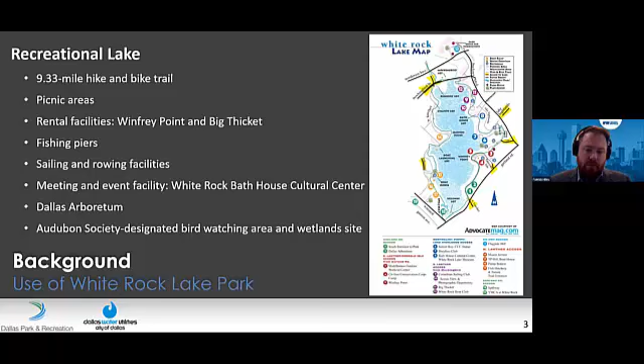So White Rock Lake is obviously an important natural asset to really all of the citizens and surrounding communities of Dallas. And as you may have realized if you've been out there or heard folks talking about White Rock, it does have some sedimentation issues. And so that's what prompted our study, this dredging feasibility study, and we'll get into a little bit more later about what that feasibility word means. But first, let's talk a little bit about the lake itself.

Originally constructed in 1910 as the original water supply reservoir for the City of Dallas, White Rock is now only a recreational lake. So the water supply benefits have been abandoned a long time ago, and now it's this beautiful natural gem in the middle of the City of Dallas. Excuse me.

As you probably know, there's an over 9-mile hike and bike trail around the lake. A lot of natural features, places where you can go enjoy a nice spring day with your family and friends. So a lot of folks make use of White Rock Lake, whether it's the lake itself for sailing, kayaking, etc., or the trails and natural areas around the lake. So it's obviously very important to the city.

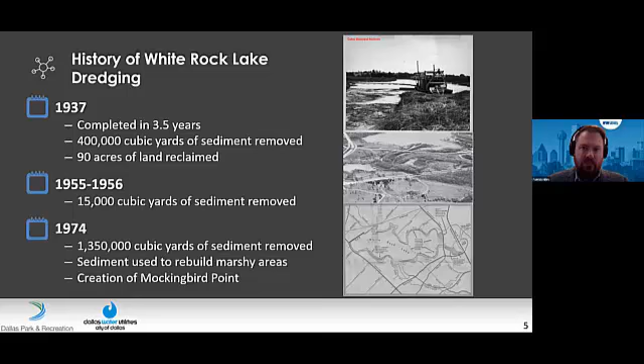One thing you may not know, though, is that over the 110-year life of the lake, originally constructed in 1910, it's been dredged 4 times: in the 30s, 50s, 70s, and most recently in the mid-90s. So on about every 20-year or so cycle, the lake has been dredged for various reasons.

1937 saw the first dredging project. 400,000 cubic yards of sediment were removed from the lake at that time. It took almost 3.5 years to complete that project. That large undertaking was in large part done in the dry, actually. From what we've heard about the historic records, there were some droughts going on in that time period, and part of the reason they were able to excavate as much as they did was because a lot of it was above water, surprisingly.

So moving forward into the 1950s, 55 and 56, only about 15,000 cubic yards of sediment removed at that time. We don't have a whole lot of information about that dredge project other than that volume. But in the 70s, it started getting larger. So almost 1.5 million cubic yards of sediment were removed. A lot of that was actually utilized to rebuild some marshy areas around the lake. So this actually created Mockingbird Point, the area near the dog park in the northwest corner of the lake, if you're familiar. Side note, today with the range of environmental regulations, et cetera, that sort of land reclamation would probably not be permittable.

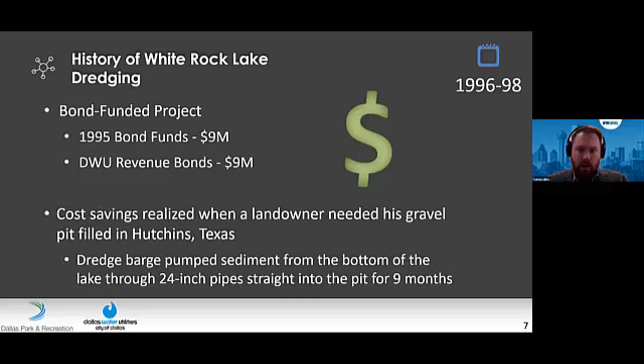Now, one thing that's really important to realize about the dredging that occurred in the 90s is there's a lot that went really well. They had a lot of good things fall into place, really the biggest of which was that a landowner down in Hutchins, Texas, had a gravel pit, a quarry, that had completed its serviceable life and needed to be filled in. Okay, and so this landowner worked out a deal with the city to basically pump all of the dredge materials from White Rock Lake to his gravel pit. He accepted all that material, dewatered it on site, and basically filled in the pit with that. That really reduced the cost.

And as we'll talk about here in a little bit, dewatering and disposal for a dredging project is really probably the largest single cost driver when it comes to figuring out how much that costs. But the dredge barge was located in the lake and pumped out sediment through a 24-inch pipe for almost 9 months straight. So quite a large activity, as you can imagine. A lot of folks around the lake still remember that effort, and so through our public involvement components, we learned a lot more. You know, just folks that had experiences with the dredge, folks that had memories of not only what happened, but really even how it came to be, and that was really helpful to shaping our study.

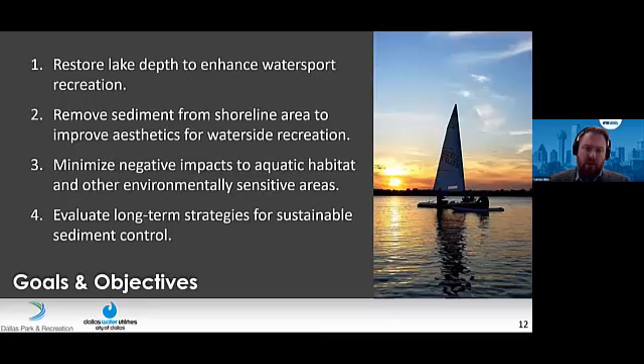From all of that, we really gathered that there are these 4 primary goals of a potential dredging project, right? So as we mentioned, there's no longer a water supply component to White Rock Lake. It has very little, if any, impact on flood control, definitely no official flood control benefits. And so the only real goal here was recreational, environmental, aesthetic improvement to the lake, right? So primary to that, restoring lake depth to enhance water sport recreation. So primarily sailing, kayaking, etc. And then also the water side recreation as well.

So number 2 there, improving the lake itself, both removing sediment, improving aesthetics, so that everyone visiting the lake is improved. So not just focusing on the boating aspect, but really the health and well-being of the entire lake. Obviously, we want to minimize any negative environmental impacts to the aquatic habitat itself or any of the environmentally sensitive areas surrounding the lake. So that was a key component.

And then finally, any of the solutions we propose, we want them to be long-term strategies, right? We want them to be sustainable. We recognize that all reservoirs, and particularly reservoirs in urbanized areas and of the size that White Rock Lake is, all of them have to deal with sedimentation in one way or another, right? So silt is going to flow down White Rock Creek continuing in the future. And so we want whatever solution we propose, whatever program we propose, to be sustainable, right?

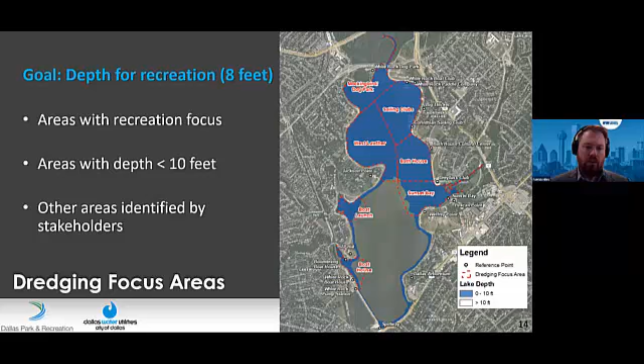there are portions of the lake that are deep enough that don't need additional depth. And so what we've done is we've highlighted in blue in this figure on the right the areas of the lake at 10 feet or less in depth. In conversations with the various boating groups, the sailing clubs, rowing clubs, as well as our own research about water sport recreation, we really set this target depth of about 8 feet. So at about 8 feet, the lake is good and usable for recreational activities.

We then further subdivided the lake, again, some based on geography and some based on community input, into these areas in the dashed red lines. What this allows us to do is to understand how much sediment is in each region of the lake. The lines are somewhat arbitrary, but they help segment up the lake. Because, for example, you may have some areas that you want to dredge to a deeper depth, and some that may not need as deep of a depth.

For example, Sunset Bay on the east side of the lake is very much a birding location. There are a lot of bird communities, waterfowl communities that either migrate through that area or call that area home. And so because of that, there's not as much boating activity, so you may not need to dredge it to the full 8-foot depth. The whole purpose there is just giving the city flexibility in developing and custom fitting a dredging program.

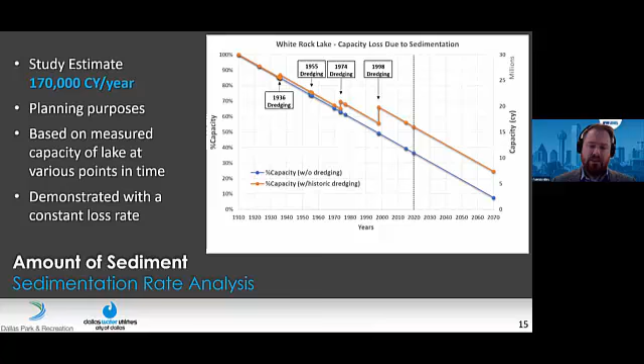Another component that was really critical to our study is trying to wrap our hands around how much sediment enters White Rock Lake on an annual basis. Now, for any of you who have tried to develop a sedimentation rate for a specific reservoir, you'll know that there's a lot of variability in that. There are a lot of different factors that affect sedimentation, and it varies wildly from year to year.

But our goal was to try to get a good average number, and so based off of the history of the lake, including the 4 dredging projects and a few different bathymetric surveys in between, we developed this number of about 170,000 cubic yards per year entering the lake on an average basis. That's what this chart on the right shows you. The orange line is the actual storage capacity of the lake. You can see it's at 100% starting in 1910, and then it's gradually decreasing over time by about 170,000 cubic yards per year.

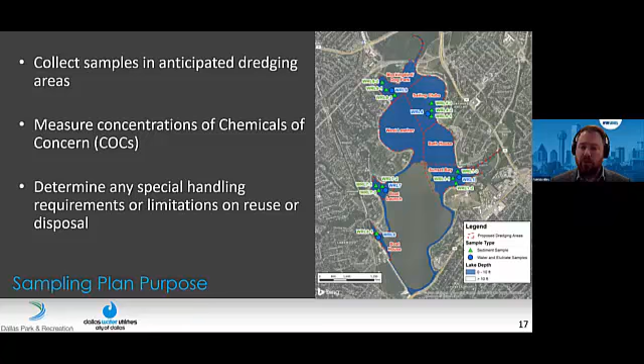Additionally, we wanted to do some screening level environmental sampling of both the reservoir sediments and the water itself, what we would call an elutriate sample, so the water near the surface. We did collect quite a few samples in various areas of the reservoir. The goal here, again, screening level, was trying to identify if there are any areas that we need to look out for, any red flags.

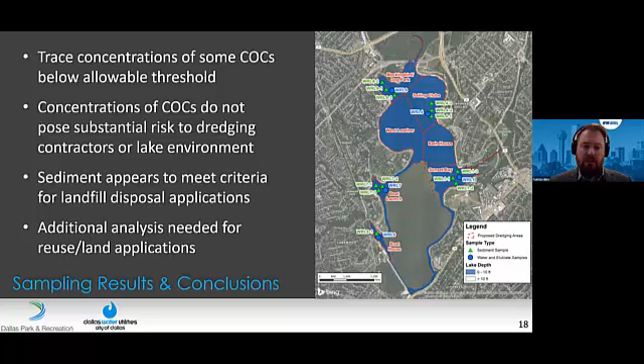In the sampling process, they measure what are called chemicals of concern, COCs. These are chemicals that are present in water bodies and may cause concern if they're above certain thresholds. The goal here was to determine if there might be any special handling requirements for a dredging project, and if there are any limitations on what can be done with the sediment after it's removed, how we could dispose of it.

And the general findings of the study were that the COCs were all below allowable thresholds, such that the concentrations would not pose any substantial risk to dredging contractors doing the dredging activities, nor any risk to the lake environment itself. The sediment also appears to meet criteria for landfill disposal applications, meaning you wouldn't have to do any additional permitting or mitigating for landfill disposal.

However, there is some additional analysis that would be needed if you were looking at a beneficial reuse or land application scenario where you're spreading the sediment in just an open area. And that's normal for a dredging project. As I said, this was screening level sampling, and the goal was really just to get the red flag.

So good news results for a dredging project as related to the sampling results, which really kind of give us the clear. There weren't any particular areas with concerns that we knew we would need to watch out for a future dredging project.

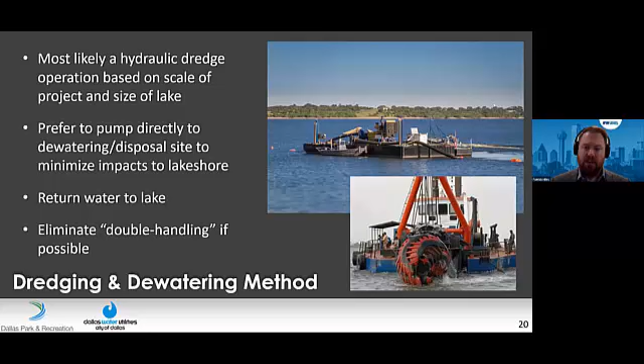So you have to remove the water from the sediment, and there's a lot of different ways to do that as well. Some are more mechanical, like belt presses, where you actually squeeze the water out of the sediment. Again, that's a little bit more applicable for a small scale dredging operation where you only have a small amount of sediment to remove. What we think would be most applicable for this will be basically constructing large settling basins where the sediment can fall out of the water, and then that water can be pumped off from those cells, those basins.

And so if you think about that, that means that there's going to be a decent amount of land that's needed just for dewatering. And so we start thinking about that and realizing, okay, we've got a large volume of sediment, we've got a large land area for dewatering it. You begin to understand why that dewatering and disposal can be such a significant component.

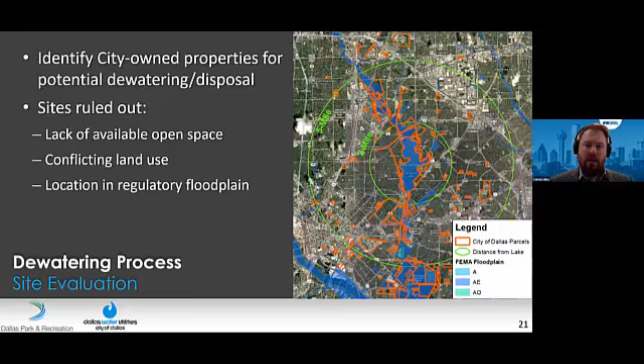Obviously, ideally, you would like to dewater the sediment at the same location where you're going to dispose of it. So for example, in the 90s, they dewatered it right adjacent to the gravel pit where it was going to be deposited. It just went straight in, and really I think the gravel pit served as the settling basin itself. That's ideal. What you want to avoid, if possible, is double handling. So a case where you dewater the sediment at one site, but then have to truck it off to a different site for disposal. That obviously just has a lot of cost implications.

And as I'm sure you're aware, with the location of White Rock Lake in general being quite urban, there's not a lot of open land around White Rock Lake itself, and the land that is open is often environmentally sensitive, like the land surrounding the lake. I know there's a lot of particular grasslands, wildflowers that grow there, and so that's not an option. You also don't want to place fill in the regulatory floodplain, because then you have either major permitting issues or LOMR-CLOMR issues, or potentially it's not even possible at all. And so you want to avoid that.

And so you can see on this map, highlighted in red, is city-owned parcels of land. So this was kind of our first take: okay, where does the city own land where they might be able to place it? Well, as you can see, a lot of the larger parcels are already fully developed. I believe one of them is actually Fair Park. We're definitely not going to be placing any dredge materials at Fair Park. And so you begin to see that there's a bit of a challenge for where to take this sediment and what to do with it.

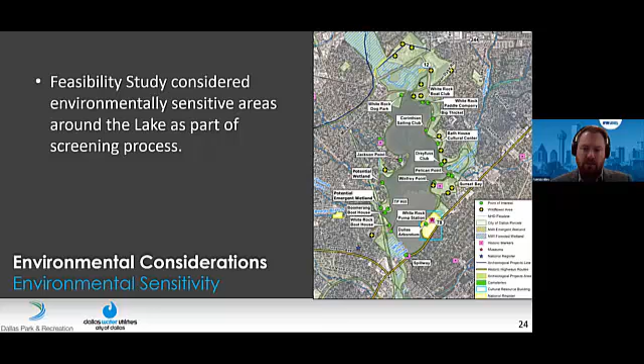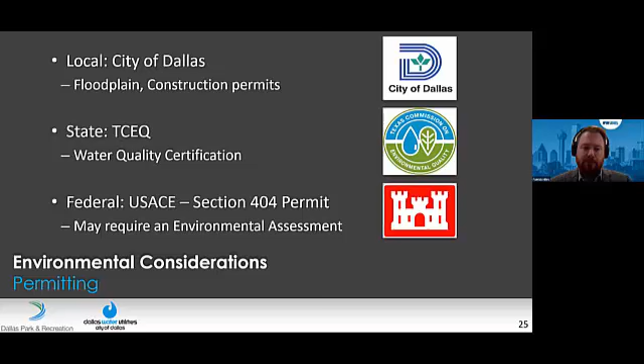As with any project, there are obviously environmental considerations, and particularly given the natural asset that White Rock Lake is, even more so. So we did a high-level desktop analysis of environmentally sensitive areas surrounding the lake. As you can see, there are a lot of areas where you would not want to be either placing materials or staging construction. And so we recognize that it's going to be fairly tight to execute a dredging project, just from figuring out where to place your construction staging areas, where the dredge barge launches from, those kinds of things.

And so we wanted, again, to have a sense of what might be feasible, recognizing that there are environmental concerns, and there are public access and recreational concerns. We certainly would not want to block off any of the trails or any of the streets around the lake. And so there's definitely a lot that has been and will continue to need to be considered with a potential dredging project at White Rock.

From an environmental permitting standpoint, obviously you have permits at the local, state, and federal level. Really the most significant one here is from the Corps of Engineers, the Section 404 permit, which, because of the nature of the dredging activities, may require an EA, an environmental assessment. Again, that formal EA in Corps of Engineers language has not been performed as of yet. Really, once the magnitude of the dredging project is selected, that will define how that permit process will go. There's also some secondary parks and wildlife and historical permitting at the state level, and obviously Fish and Wildlife at the federal level for threatened and endangered species.

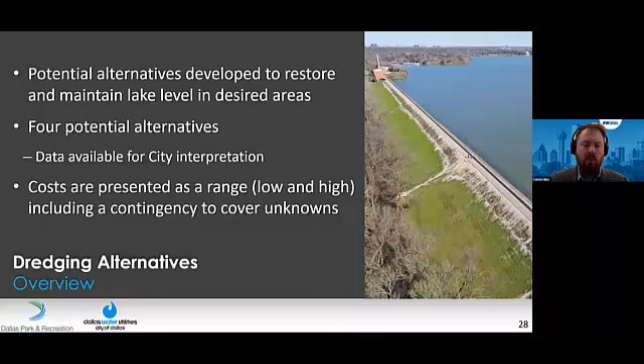So with all of this in mind, again, we as engineers, we want solutions, right? And so we really sought to develop a range of alternatives that would present what's possible. Again, this is a feasibility study. We want to understand the range of what could happen. And so as such, we really tried to just focus on that aspect of a range. And so we developed 4 possible alternatives, and really, I don't think any of these represent the golden ticket. None of these exact scenarios is what would be proposed, but it gives a sense of the range.

And then the other thing that was really important to us is to provide the city with enough data that they could interpret and manipulate and size a dredging program to fit the needs of the community and to fit the available funding, right? And so there is a lot of data in the background of all this that can be toggled. There's a whole lot of variables, as you can imagine. And so these 4 alternatives represent the range of what could be possible.

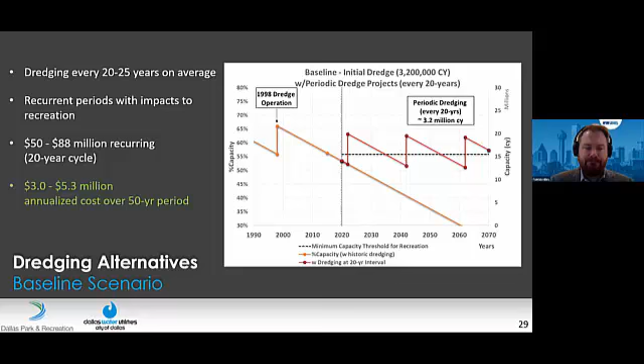So starting out, we have the baseline scenario. So this represents something similar to what has been performed in the past. So dredging every 20 to 25 years. I'll introduce you to this graph on the right. The orange line is obviously the sedimentation rate if we did nothing. So you can see starting from the 1998 dredging operation, we have a data point at the 2015 bathymetric survey, and then today, projecting that forward, the lake will continue to decrease.

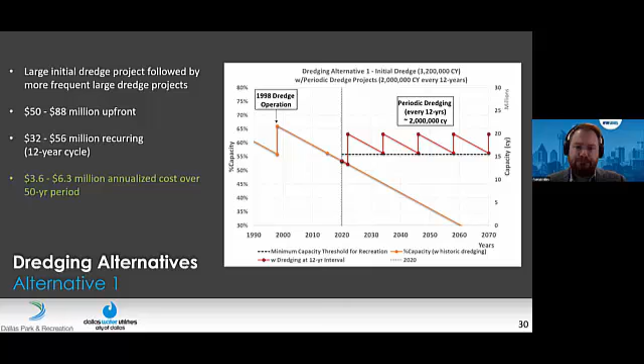And so the red line is then what these dredging activities might be. So in this baseline scenario, we say, okay, every 20 years approximately, we're going to dredge just over 3 million cubic yards. And you can see the red line spikes up during that dredge project and then begins to decrease again. I point out the black dashed line, that's that threshold depth of the target of 8 feet. So once you dip below that depth, you're beginning to have recreational impacts. Okay, that'll be important in comparing these alternatives as we move forward. So you can see that the baseline scenario does have some recreational impacts for a period of a few years before we're able to get around to doing a dredging project to remediate that.

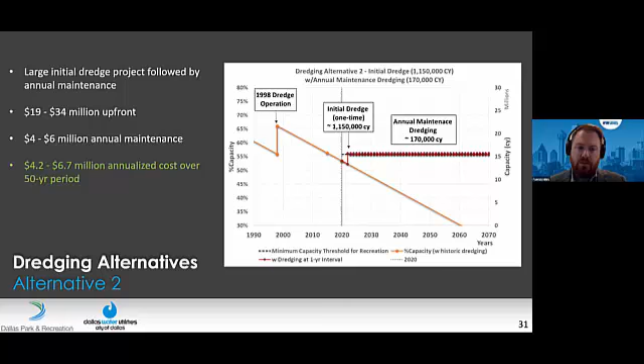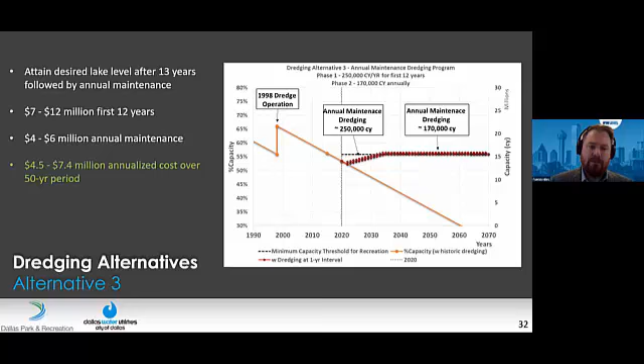And you can feel free to look at the costs and everything on the left-hand side. I'm going to summarize all of that after we get through the alternatives, just so that we're comparing apples and apples. But our first actual alternative says, okay, rather than waiting 20 years between dredge projects, let's dredge every 12 years. And so here we start with a large 1.2 million cubic yard dredging program. And then rather than waiting 20 years, we're going to dredge approximately every 12 years. And those dredge programs only need to be 2 million yards because we haven't let ourselves get below the threshold. So you can see we stay above that threshold line the whole time.

Alternative 2 is a completely different approach to dredging, right? Instead of doing large dredge programs infrequently, we're going to establish an annual maintenance dredging program. So alternative 2 considers a one-time medium-sized dredge of just over 1 million cubic yards followed by annual maintenance dredging, where you're basically just dredging whatever comes in. Again, based on our estimate of historical data, about 170,000 cubic yards on average. Okay, and that just keeps you at the desired depth, the threshold depth.

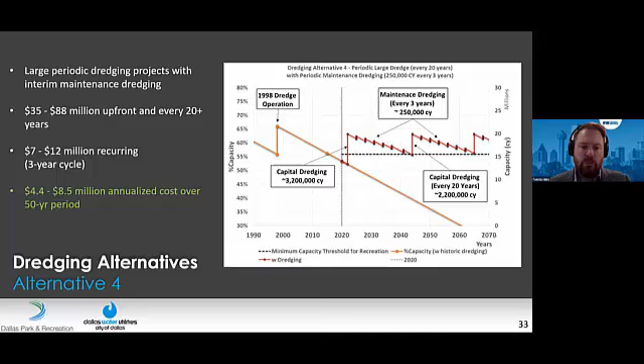Alternative 3 kind of takes that approach and adjusts it a little bit, where instead of having a large initial dredge, you just have a little bit more aggressive annual dredging for the first 12 years. So for 12 years, you're trying to catch up to the threshold depth, and that takes about 250,000 cubic yards per year. And then after that, you're just staying at the 170,000 cubic yards.

Alternative 4, and I kind of call this our hybrid model. This basically combines large dredging programs infrequently with interim maintenance dredging. So you can see this one, you start off again with that 3.2 million to get it up to the desired level. And then rather than annual dredging, you're going to dredge 250,000 cubic yards every 3 years. Okay, and what that basically does is buy you time; it extends the time between your large dredge projects. So if you recall, in alternative 1 we had a large dredge project every 12 years. Now here with alternative 4, we have large dredge projects every 20 years. So you've got every 3 years, 250,000 cubic yards, and every 20, just over 2 million cubic yards.

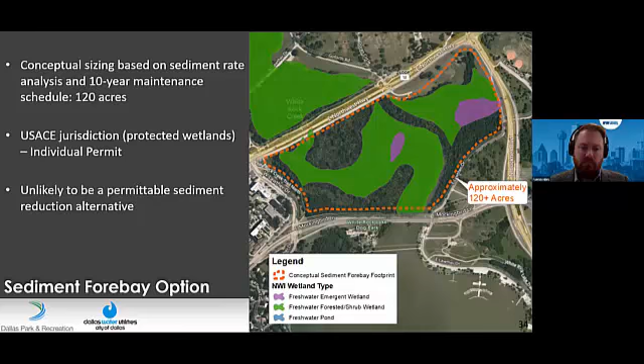So at the assumed sedimentation rate, 170,000 cubic yards per year, and assuming a 10-year maintenance cycle, so every 10 years you need to come in and effectively dredge out that material from the sediment forebay, you would need about 120 acres to be able to have a facility like that. That would need to be clear, smooth slopes, smooth surfaces.

And as you can imagine, finding 120 acres in urban Dallas is going to be pretty challenging. But then also you need that to be really as close to the lake as you can be. And as you can see from the figure on the right, 120 acres would effectively take out all of the emergent and forested wetlands immediately upstream in the headwaters. So basically between Mockingbird and Northwest Highway, all of that area would need to be converted to a sediment forebay.

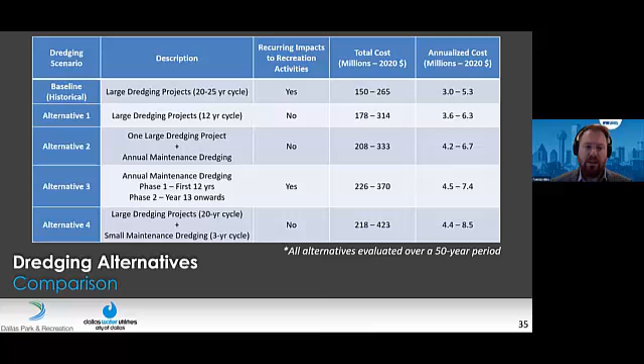So comparing our 4 alternatives against our baseline scenario, you can see that we have a wide variability in costs. As I mentioned, there's a lot of unknowns still at this point, and so that's why you see these really wide ranges. I will direct your attention to the far right column. Because the dredge frequency and magnitude is quite variable, we decided that it would be best to compare our cost on an annualized basis. So we just selected a 50-year life cycle. That's quite arbitrary, just gave us something to compare everything against.

And so you can see the range of cost. The baseline approach, so infrequent large dredging every 20 to 25 years, which would have some recreational impacts, is going to cost between $3 and almost $5.5 million per year, annualized over a 50-year life cycle. The rest of your alternatives range between $3.5 million to as much as $8.5 million per year, depending on the dredge scenario.